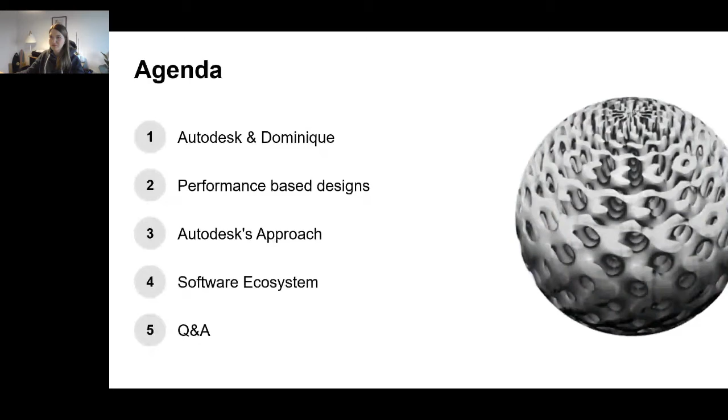So myself, Dominique, I started working for Autodesk almost 7 years ago now. As you see, I have always had a passion for additive manufacturing, so I have always been part of the additive team, and especially the software development team, the team that works on Netfabb, the team that works on Fusion, the team that works on Powermill additive solutions.

Last year, I started a bit of a shift in my career, so I'm now the product manager for research and innovation. I'm helping the team plan ahead on what's coming in 5 and 10 years, what kind of trends we need to prepare for, which kind of technology we need to prepare for, and how the software needs to develop to keep up with future things coming from customers, partners, ecosystems, and competitors. So that's my new role. It's not completely focused on additive anymore, it's focused on whole manufacturing now.

From my education, I have a master's degree in material science and engineering, and a bachelor's in microsystems technology. I switched over to software pretty quickly after my education. I'm from Germany originally, so I'm born in Germany, but I live in Denmark. I live in Denmark because there's lots of water, and I love water sports. My husband is Danish, so that's why we're living in Denmark.

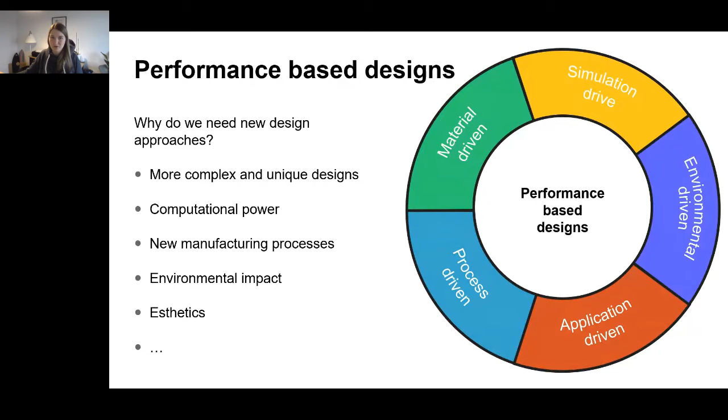So there are many solutions out there, many great solutions, and we try to tackle it from our own perspective and focus on our own platform we're using. And we can dive into it.

The approach we are taking is called volumetric modeling. On the left side, you see our traditional approach with B-Reps, where you define your boundary representation, define sketches, extrude them. It's the classic design, built up over decades now. On the right-hand side, you see our volumetric approach, which is basically not boundary represented anymore. It can be a mathematical description, it can be voxel-based. There are many possibilities for how it can be described.

But you also see the performance difference. When you look at the video and how quickly the software is responding, even with really complex structures, this is really the advantage of the new design. It's not just having new structures and being able to design new things, it's really also the computational power that comes with it.

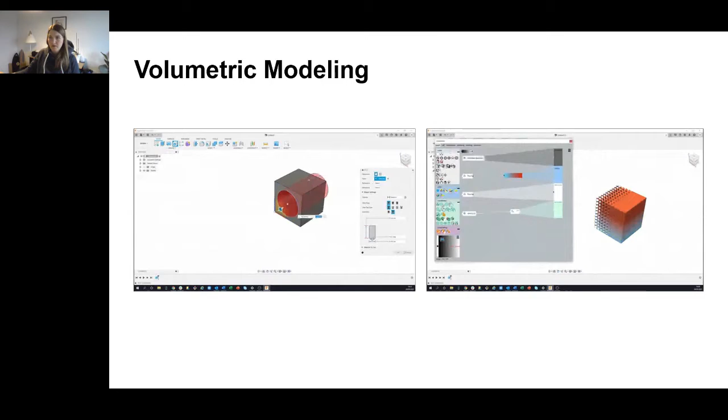So when we look at this, we would divide it into 3 categories. The first one is volumetric geometries. With this approach of modeling, you can create entirely new structures from scratch. You can use simulation data, scan data, a similar approach to generative design, and create completely new parts from scratch without using any sketches. You can describe them by mathematical functions, for example.

The second category is optimizing geometry. For example, surface patterns or the grids you can see for speakers, as well as textures. These 2 approaches we can also do with traditional CAD, there's no limitation for that. But there is a limitation, as I said, in terms of performance and computational power. And that is why these 2 approaches are super interesting to look at.

The third category is volumetric properties. We call it volumetric properties because every body has properties. With these volumetric properties, we can, for the first time, really describe the inside of a body. So we are talking about color, material gradients, lattice structures. This is why, for our first approach, we are focusing on that volumetric property field, because this is something that is really difficult to do with traditional CAD and almost impossible.

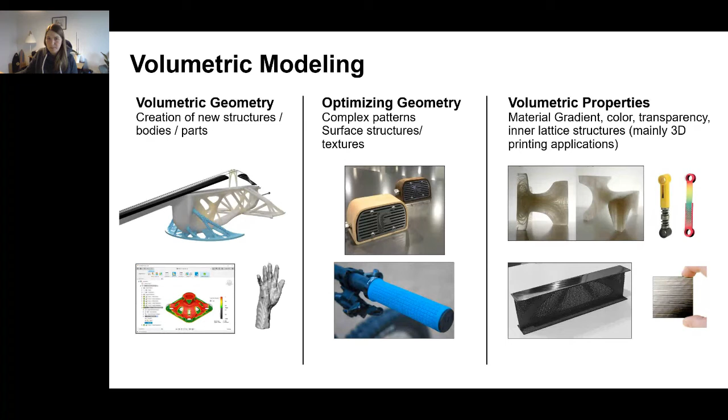There are specialty tools that can do that today, but you always have to leave your CAD system to do that. So what does it mean, volumetric properties? I think the focus we're taking for now is really the additive space, because the biggest advantage is in that area. So describing a multicolor, completely three-dimensional part, supporting multi-material printers - that's where the hardware is still ahead of the software and where we need to pick up. Define porosity, so creating lattice structures, as well as supporting 3D textures. If you want a natural texture, like a tree texture, for example, you need a way to tell your machine what to do.

And to tell your machine what to do, we are also part of the 3MF consortium. As you maybe know, it is a new standardized file format for 3D printing, and we onboarded volumetric information. So you now can have a file format where you can also add these informations, like color information, texture information, as well as material information.

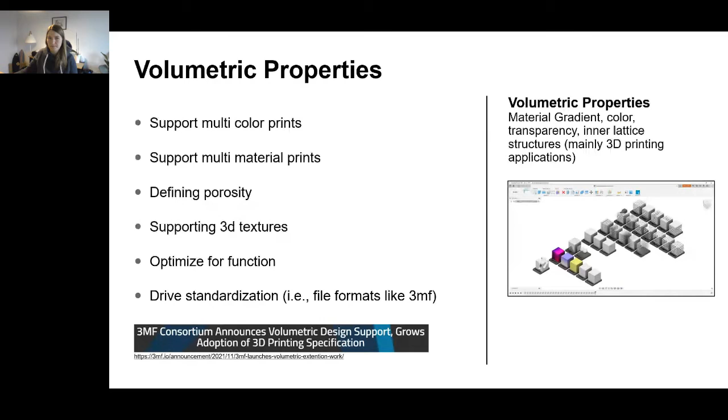But how is it for a user? The biggest question is, how do we open this up for a user without confusing them, without scaring them, while also supporting people who aren't experts in the field, because that's what you need to be nowadays. Our approach is to take it simple.

You always describe your body with: is it a solid or a mesh body? What kind of color does it have? And what kind of material is it? And now we're opening this up.

You can control it. You can say, I don't want one color, I want a color gradient. I don't want one material, I want several materials and want to create a gradient out of it. Or I want porosity because I'm designing a bone structure, or just a lattice for light weighting. I need a way to describe it. So this is how we approach it. We're opening up the volume for the user, and they can manipulate it now.

The first example, which went live yesterday, is focused on latticing, because that's the most straightforward one - it's the one everybody's screaming about in additive. So we added that functionality in our platform Fusion. And as you see, it's super simple to use.

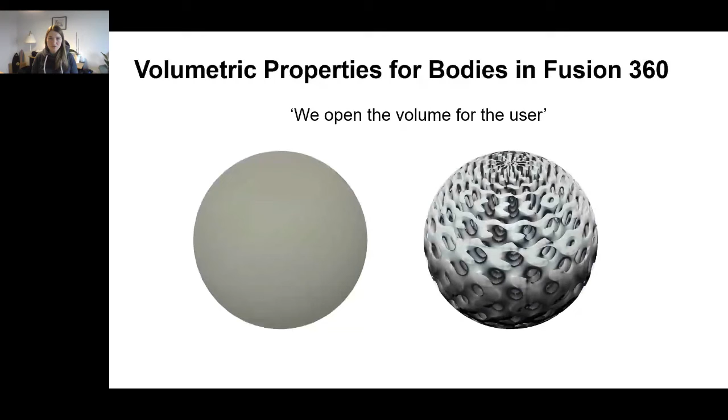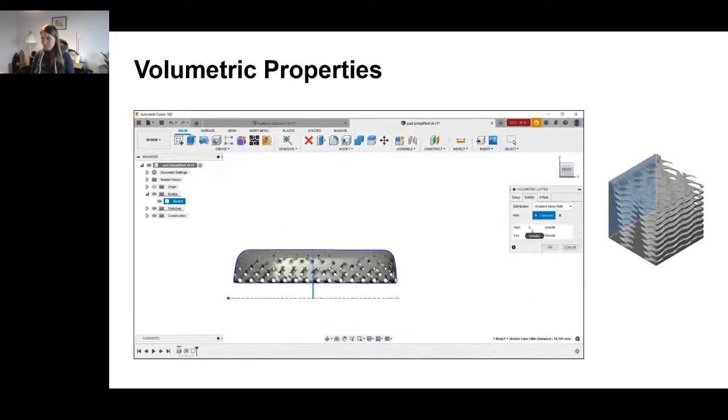We broke it down into just a handful of parameters you can change. You have a quick response, you can play with it, you can come up with different solutions. And in the end, you can take it to your printer and print it, or export it and use your slicer. But this was our first approach - how do we simply give people access to create lattice structures, as well as additional skins, without modeling it in a really complicated way. Just natural CAD environments for beginners.

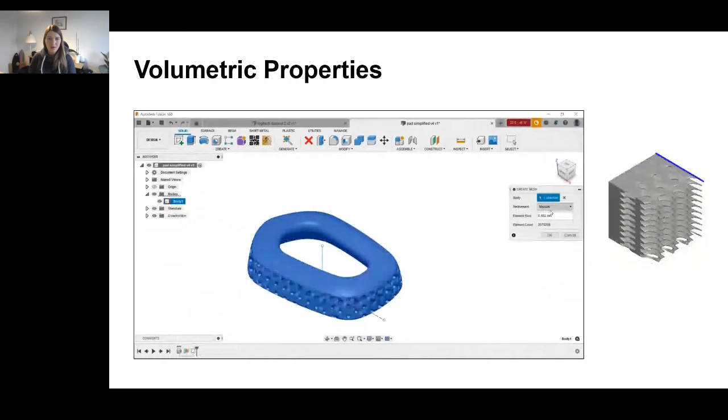But a lot of people would say this isn't enough. I want to manipulate it, I want to do more. And this is also what is coming. Right now we offered a tool for our beginners, a tool you can feel comfortable with, that you can get started with, that you can start exploring. But there's more that people want, and there's more to come.

This is why we think there needs to be some more advancement, something more complex. But we also want to give people the chance to start easy, because it's probably 90% of the time that you're doing the same thing to your parts. And to make that a little easier, we gave people a standard format they can use.

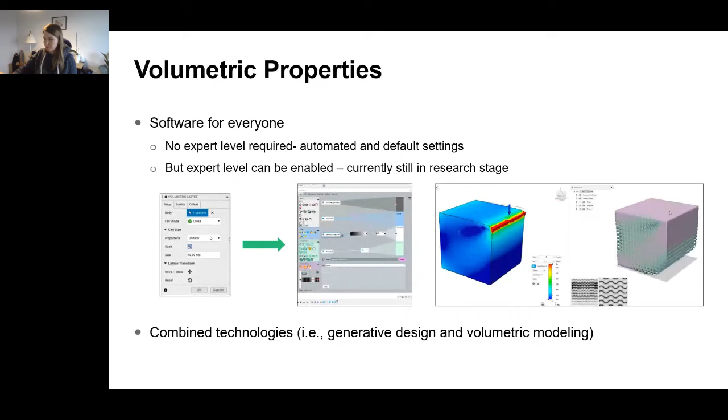So what can come next, and what are the possibilities we are seeing in the future? We talked about creating new geometries. I think for creating new geometries, as I already said, we could use simulation results to drive new designs.

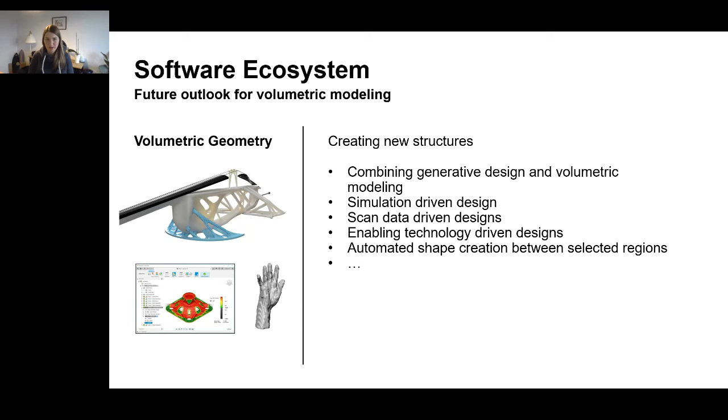So having a part that's perfectly designed for an HP printer or for an EOS machine. We could also go and start having automated shape generators. So if you want to connect two parts and you don't care how it looks, you just need a quick connection, you could generate these ones automatically and super quick.

The same when we talk about optimizing geometry. I think there's a lot of potential, for example, complex patterns. It's a pain to draw them nowadays and to really come up with unique patterns, for example, logo patterns. It's a lot of work and it takes a lot of time. We could automate some of that and make it a lot more accessible and easy.

When you think about a serial number or to detect your parts, having QR codes, that can all be automated and much easier with that technology. I'm also thinking about drain holes. So if you want to get rid of your powder, there are some easy ways to do that. We could automate that. And we also talked about textures. I think that's something that will come more and more, and we will see a lot more. So these are just some thoughts and examples of where this technology can go next.

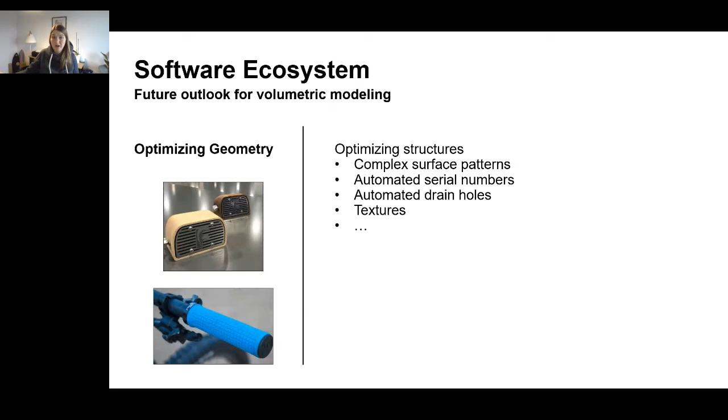On top of that, as you know, or maybe don't, in our CAD platform we started to onboard all our manufacturing tools because we believe that combining all these tools gives you the real power. We have a lot of customers that use CNC machining, but they might also want to inspect their parts. They might also have a robot, also have an additive machine, and at the moment they switch to a different software system every time they use it.

So to support them, we are putting everything in one platform. We're making it accessible. We're preparing also for things like hybrid manufacturing, when you think about combining additive and subtractive, or having robotics combined with additive. Very common things that are already possible today, but still super complicated in the software.

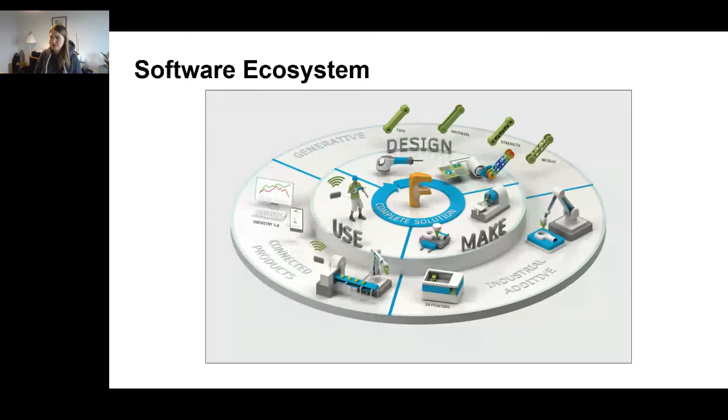On top of that, we think that the ecosystem is super important. The design tool is still your base for everything. So having a lot of advanced manufacturing tools is great, but if I cannot design for them, or I need to go into a different version or a different solution, I might have problems because I have different file formats. I need to export, I need to import, I might lose information because of that. This is something we want to avoid, and why we are building out this whole platform.

And on top of that, I think what is really important to make us successful and prepare us for these really complex structures is we need a data model that is accessible for people. A person executing on a machine needs different data than the designer, and we need to be able to control that.

We need automation so that we are not wasting time to create drawings. This is something that should go automatically, so we can focus on the more important things, how we can save time, save money, how we can optimize our parts perfectly for our machines, and not spend time on a task nobody wants to do.

But we also need intelligent systems. We all know that we can start the same print job twice and it comes out different. We need to tell the software how to learn from that. So that's also something that's coming and that needs to come.

Another one is independency. I mean, some people are using a Mac nowadays. Other people like to see their information on a tablet. Maybe you're on vacation, but you still want to know what's going on in your project. You want to have access with your phone. So there needs to be a lot more independency. And of course, there are new technologies popping up everywhere. We need to be prepared for them. We need to be able to onboard them as well.

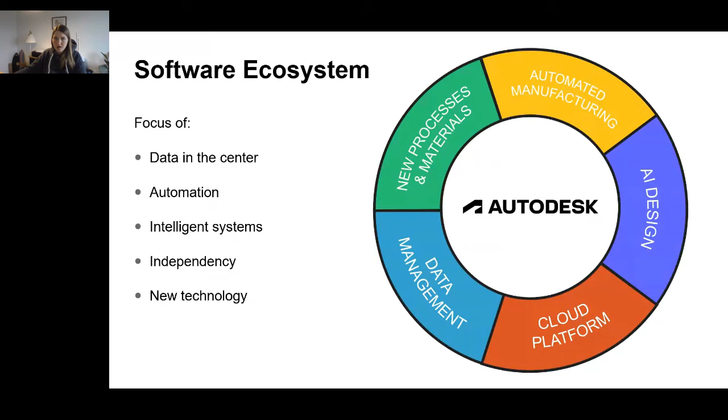And finally, I think we all need to be aware that not everybody will use our platform and our solution. There are great solutions out there. We need to open up. We need to work better together with our partners. We need to ensure that the data model can be translated into whatever tool you want to use and give you the independence you need. And I think if this is all in place, and I hope it's in place very soon, then we can really talk about complex structures and how we can prepare for them, and how software can really enable new designs.